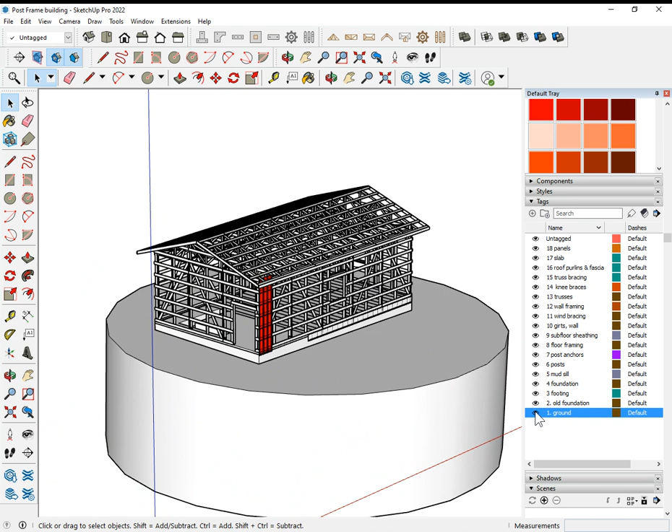I'm going to start from the ground and explain what I'm doing here. Let me turn off all these layers, and then we'll start from the existing foundation and show how I'm planning on building this post frame building around what's existing.

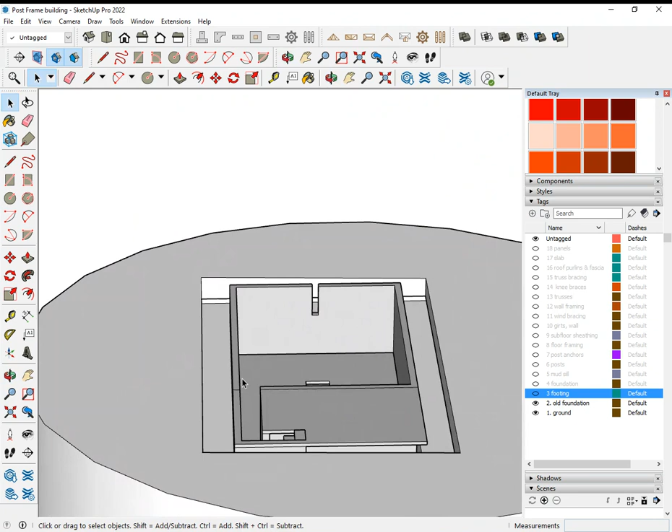Okay, so now the only thing I have visible on the screen is the existing building. There was a building, 100-year-old building or maybe older, over this foundation with the floor, but the building's been torn down, and we're trying to preserve the basement or root cellar with the floor, but we want to build a new building around it.

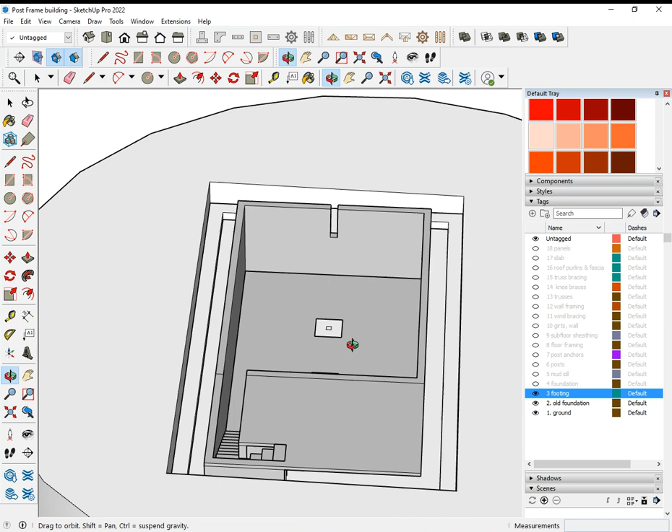So this is showing the new excavation, and this is showing the new footing right here. The new footing, we're thinking it's probably going to be 2 feet wide around the whole existing root cellar by 10 inches.

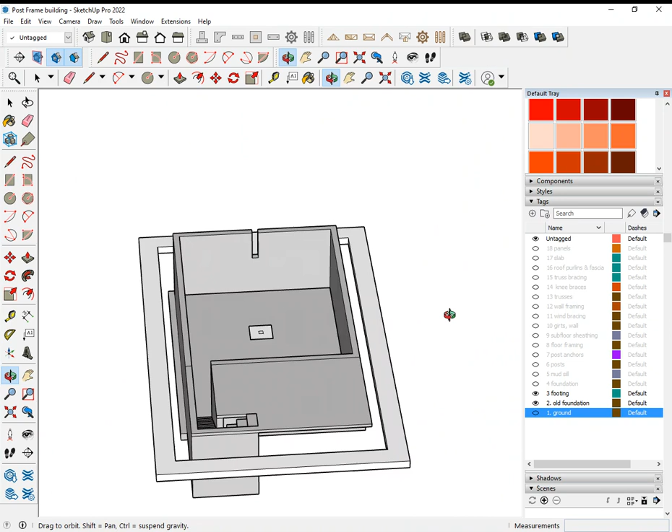Okay. Now I did not go all the way tight up against the existing foundation because I wanted to leave a little bit of leeway, and maybe it's going to help the old foundation so it doesn't crumble to pieces.

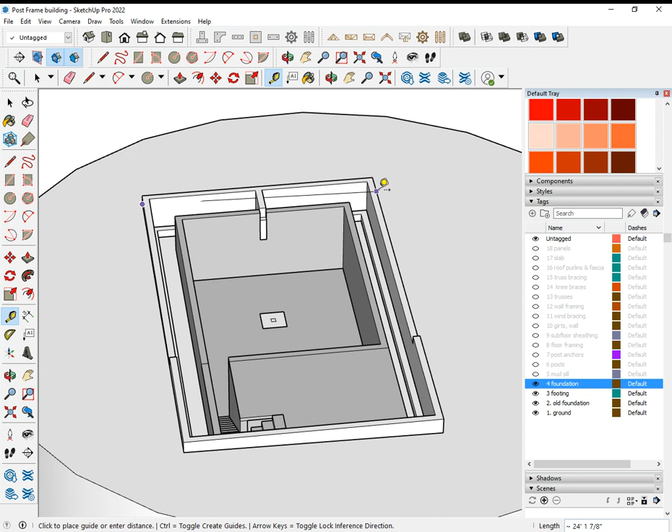Plus, once the new foundation is poured on the new footing, that's going to give me a nice even number. See if I can hook it right. Yeah, so the new building will be about 24 feet.

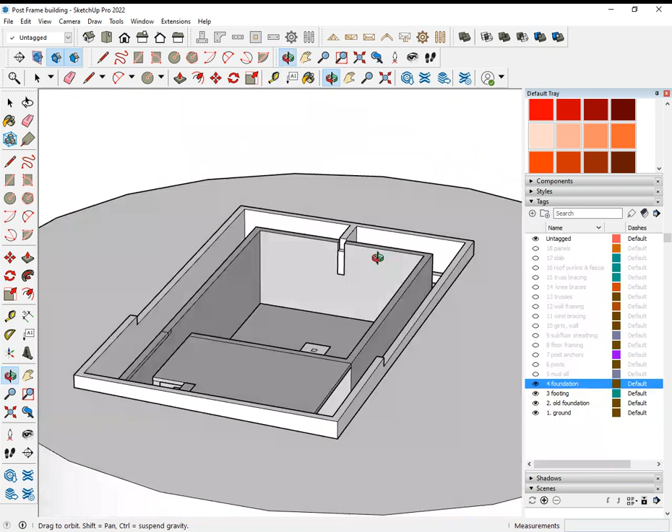Now also, what that's going to do by making it a little bit wider, if this old foundation is not completely square, which I doubt it is, if it's not completely level, which I doubt it is, we're just building a new foundation around it. So our new building is going to be square and level.

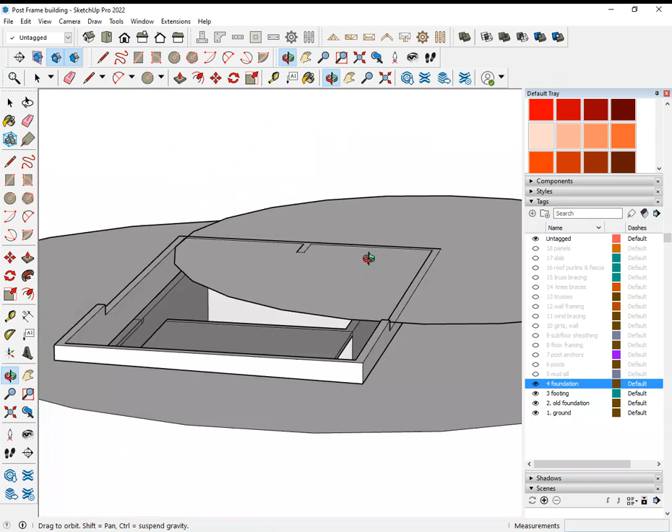Additionally, I have built this new foundation just a little bit above the old one. You see that? See how it's a little bit above that? The reason I want to do that is because I'm not going to rely on that existing foundation to be level. And when we put the floor together, you'll see why I decided to do the floor above the old foundation, because I want it to be completely independent.

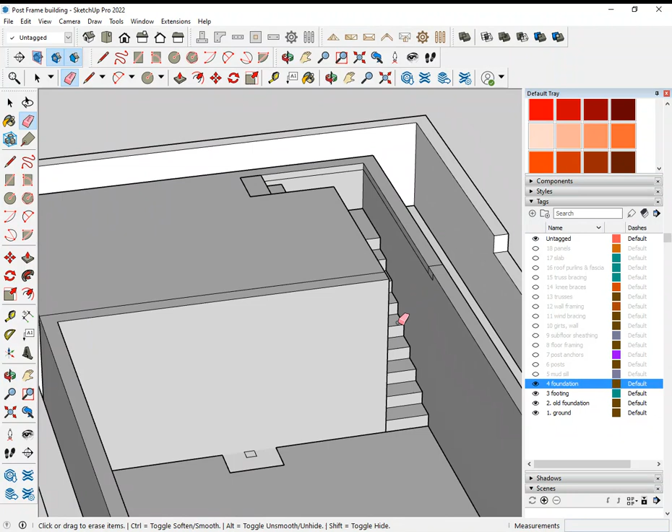Now, I'm not really 100% sure exactly how these existing stairs go, but it doesn't matter. This is just for the purpose of showing how the new building is going to cover the old building.

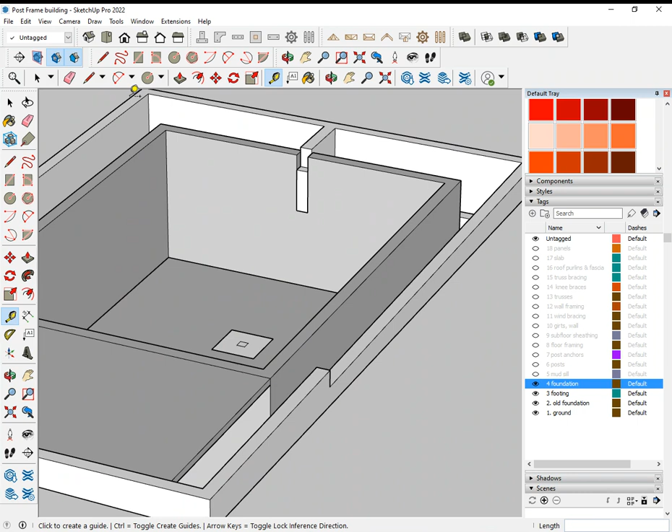Okay, so once the new foundation's poured, like I said, it's going to be 24 feet wide. And then I went a little bit longer. I went as tight as I could to the front here, but then it's about 40 feet, because you see how the foundation is stepped up. And I chose 40 feet because it's a nice even number that'll work out well with my spacing.

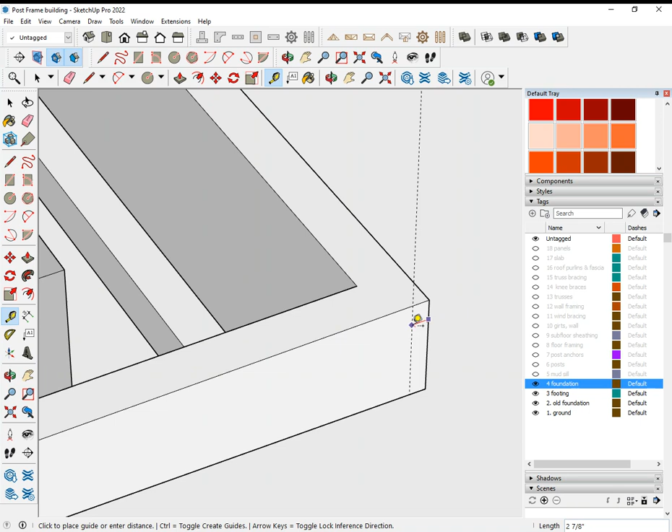And it's showing 40 feet 3/16, but that's not accurate. Let's see if I can keep this on the red plane. There you go. So it's 40 feet by 24.

Okay, so once this is all excavated and it's all poured, by doing that 40 feet, I had to add this little foundation to carry the floor right here.

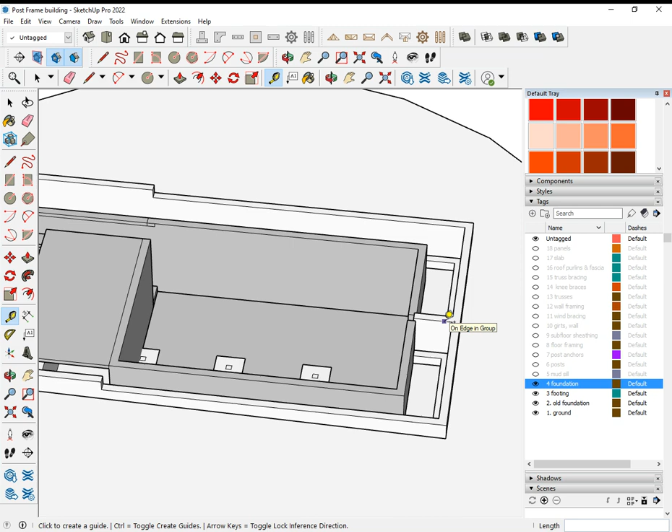Okay, so the foundation is poured. Then we come back, and that's when we put the mud sill on. The mud sill goes around the foundation like this. Now, right here, this is a 2x8 mud sill, and I'll show you why later.

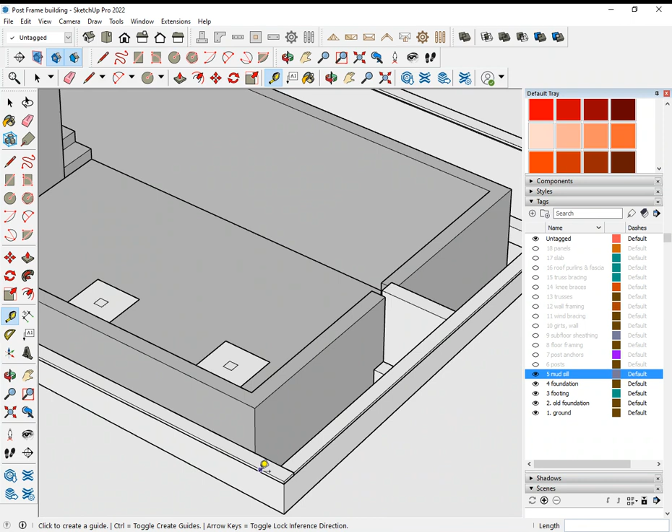Okay, I haven't shown the anchor bolts or anything, but this would get anchor bolts, and it would be the 2x8 mud sill. Now, right here, this part of the framing, it's just floating over the old foundation.

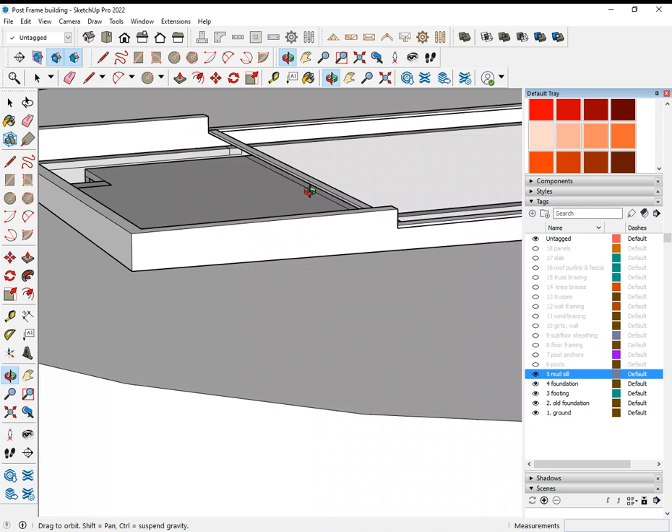Okay, don't worry about that, because we'll frame this 3 inches or whatever, however high it is above the foundation. We'll frame that in and make it so it rests some way on the old foundation. And this is not a critical bearing point. It's just all it's going to be is floor load. So it doesn't have to be on top of a new foundation or anything.

I just didn't want to start demolition on the old foundation. I don't want to demolish any of the old foundation. I want to leave it in place. We're just building a floor over it.

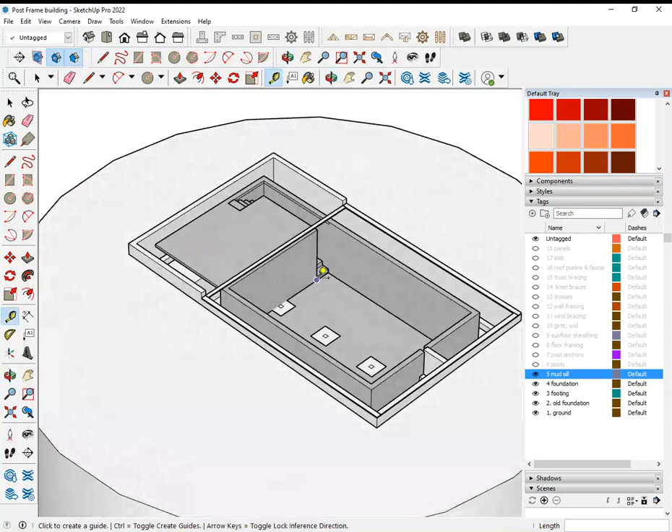Okay, so once the mud sill goes on, the next thing that goes on is the posts. So this is how my posts are going to go. They're evenly spaced, and the posts are resting on the mud sill right here. And the posts on this side are resting on the new foundation, where the new foundation steps up.

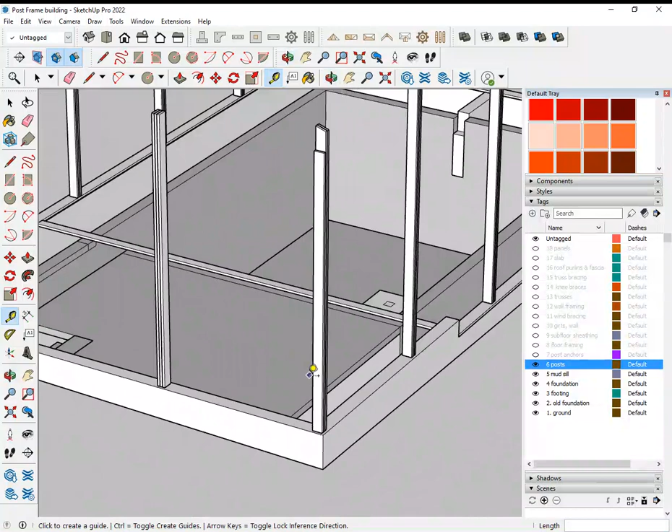And once I turn on the floor layer, it's going to make sense why the foundation steps up like this, because we want the floor to be where you can walk across it and there's no step up in the floor.

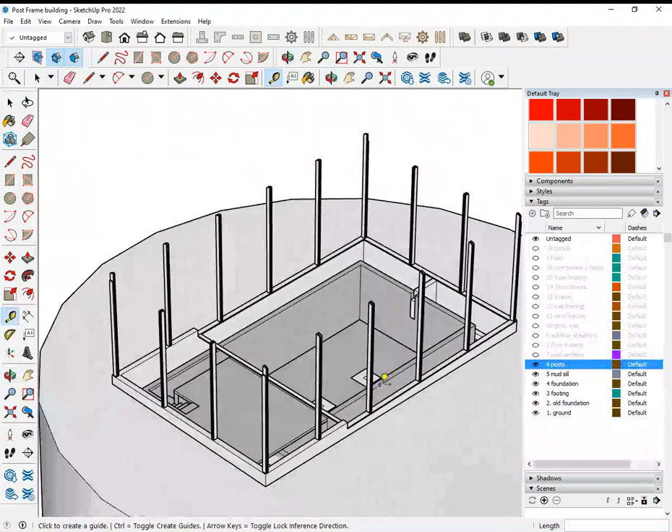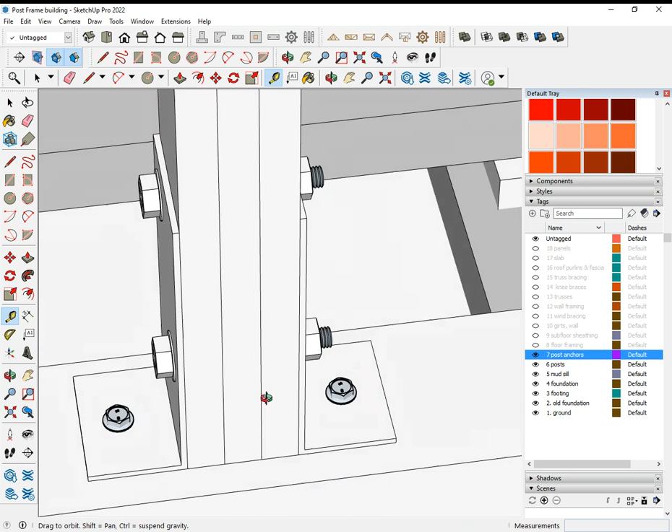Okay. But just look at the posts right now. Now how those are anchored to the foundation is like this, with these angle iron pieces. And this right here, it would just be a hole that we drill into the foundation. We epoxy in. I just put these bolts in because they were easy to download, but really what it's going to be is a rod epoxied in a hole with a nut and a washer.

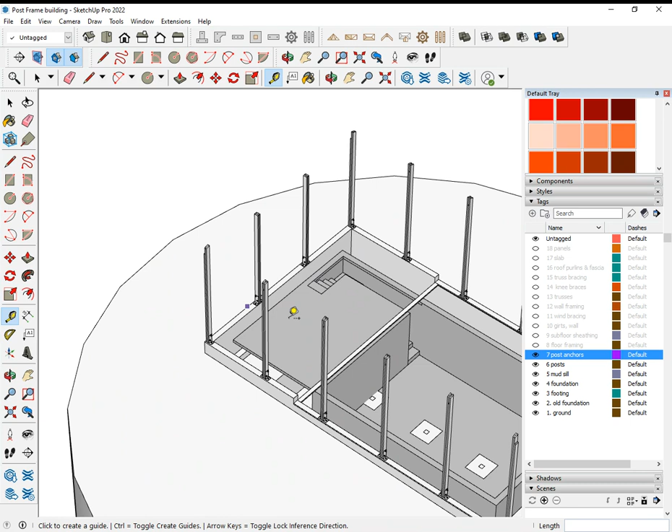And then the posts, they'll have the bolts going through the posts and through the angle irons. Okay. So that shows how the posts are anchored to the foundation through the mud sill. The only thing you're not seeing is I haven't drawn anchor bolts in from the foundation to the mud sill, but they would all go in here. Okay. I could draw those in later.

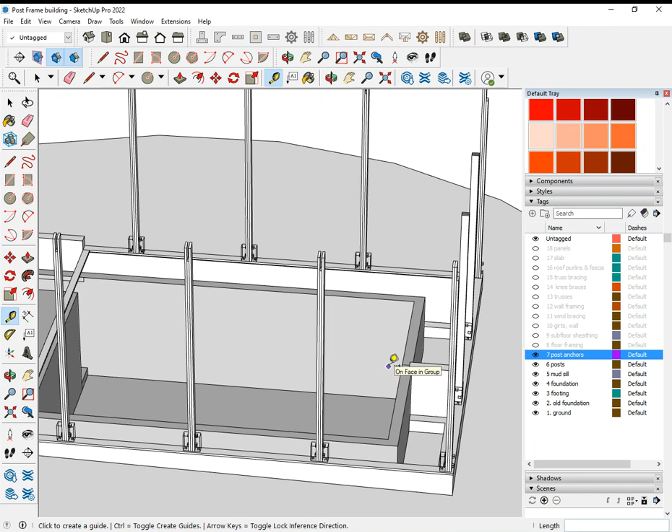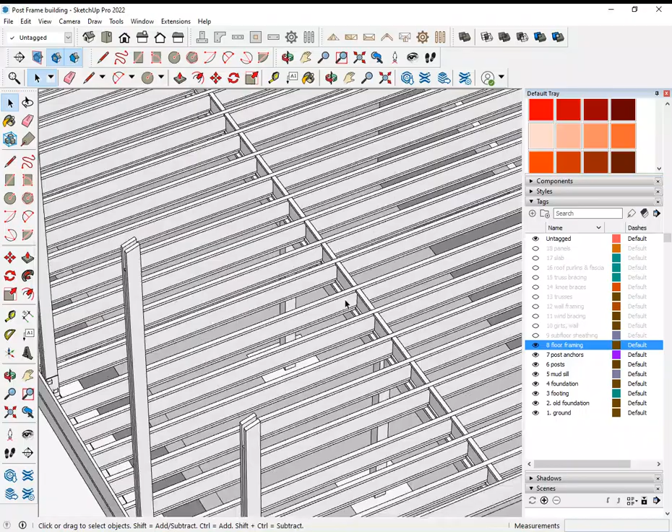Now, the next thing that goes on after the posts are set up and anchored is the floor framing. So here's the floor framing, the new TJI joists. They're 16 inches on center. And I am going to have to put a new girder beam down in the old foundation because the joists are not going to span 24 feet without a center girder. So that center girder beam is going to have to be there.

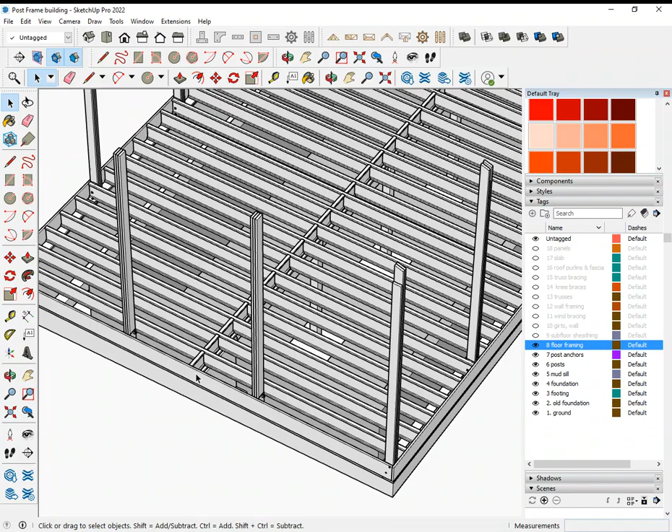I'm just planning these as wood posts, but they could be metal posts. I'm just planning the girder beam as a wood beam, but it could be a metal beam. The thing is that there's going to have to be a center girder there, and we can't use the old girder framing because it's just too out of plumb. It's just garbage. I can't use it. I have to redo it. Okay, so that's why these new concrete footers are going to be in to hold the posts.

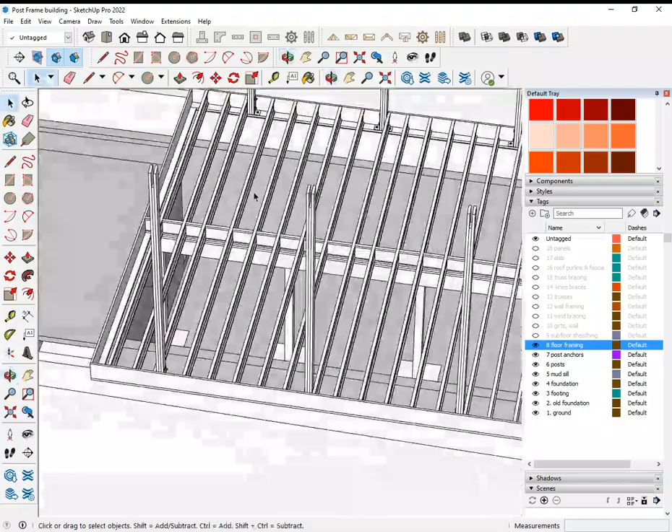All right. And I'm not even sure right now if there's a dirt floor down there or if it's concrete or what it is, but whatever it is, we're going to have to dig down and pour some footers down there to hold the load of the center girder. And the joists are blocked at the center. Okay, so that's the floor framing. Next thing we do is we sheet the floor like that. Okay, so now it's starting to look more like a building.

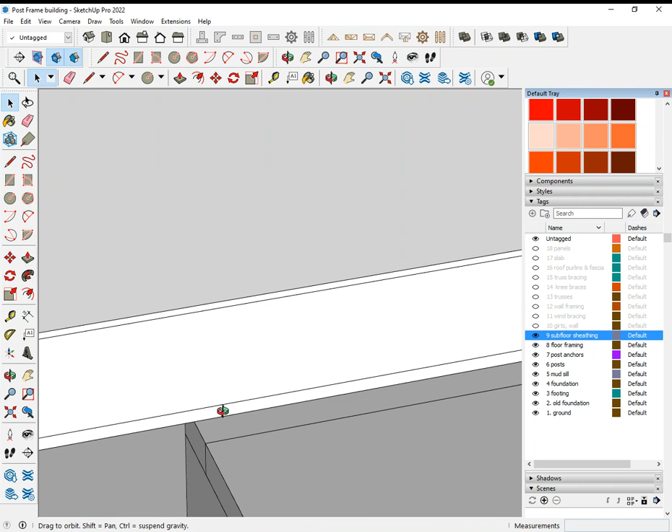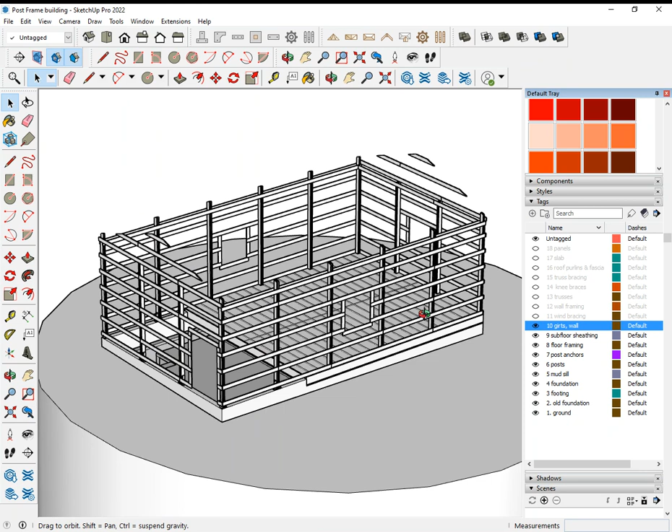And this is the part where we put some blocking under here to keep this attached, just to keep it from sagging right here. That's not a problem. I just haven't drawn it because it's something so obvious that it will be done on site. Next thing that goes on is the wall girts. Okay, this will hold all the posts up, keep the posts from falling down while we're building.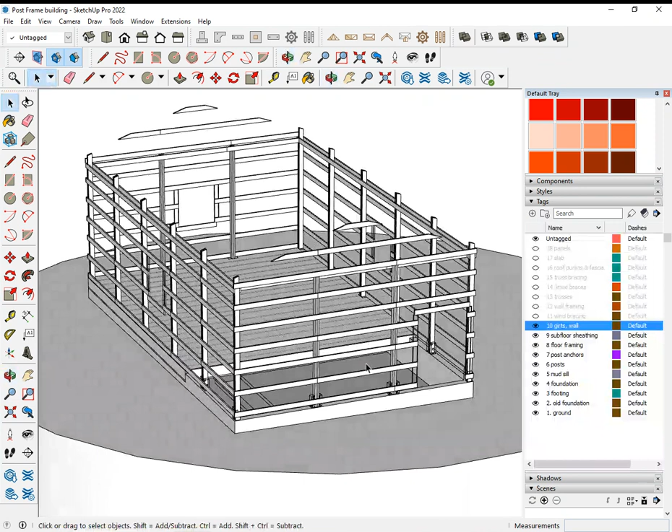Now, the windows, we don't know if there's going to be windows or not. I just drew those windows because this is really the only place the windows could go if there were windows. On the front, there's the double door right there that we talked about. And let's look at the inside. Now we need some wind bracing. This is the wind bracing. All right, see all these diagonal ones?

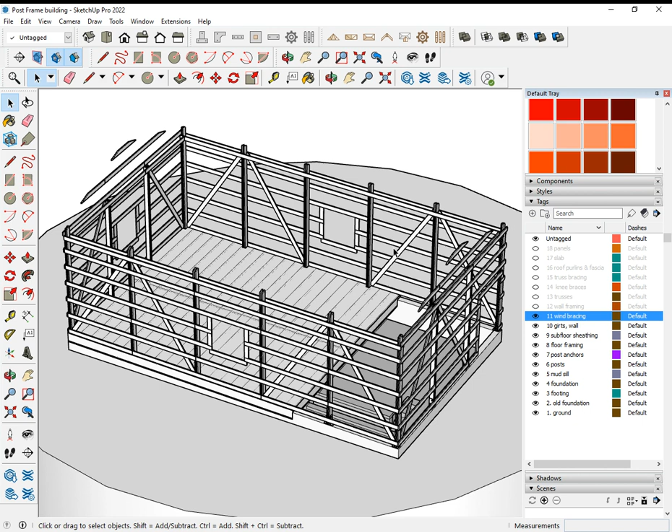If I don't put the wind bracing on, what's going to happen is the wind is going to blow on this wall and it's going to want to blow this long wall over. It could blow from either way and it could blow these walls over because the metal on the outside of the building is not strong enough to resist the wind. So if I don't put that wind bracing on, then the walls could blow over this way. All right. So the wind bracing has to go on.

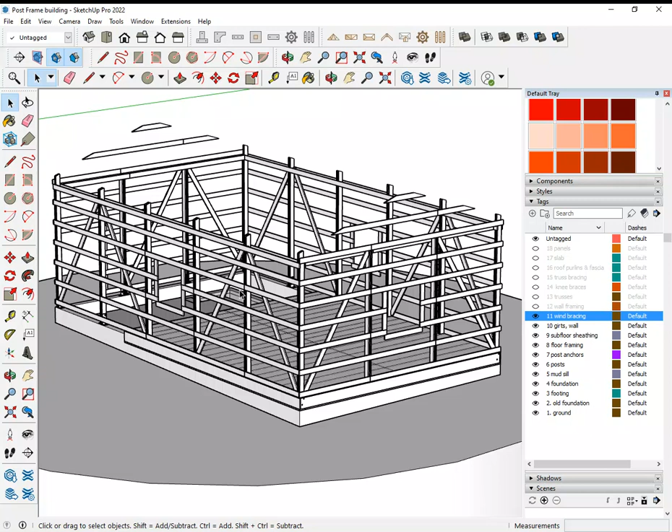That's why I said if there are windows, the windows have to go right here so they're not in the way of the wind bracing. Otherwise the wind bracing will have to be reconfigured. And this to me seemed like the most obvious place for windows. If there are no windows, then it'll have to be one of those translucent rows of panels up on top or something else. But if there's no windows, that's not a problem. Those will just get covered over.

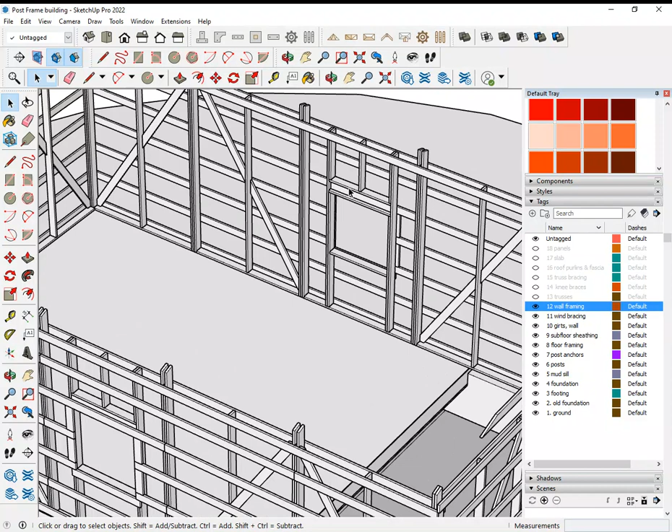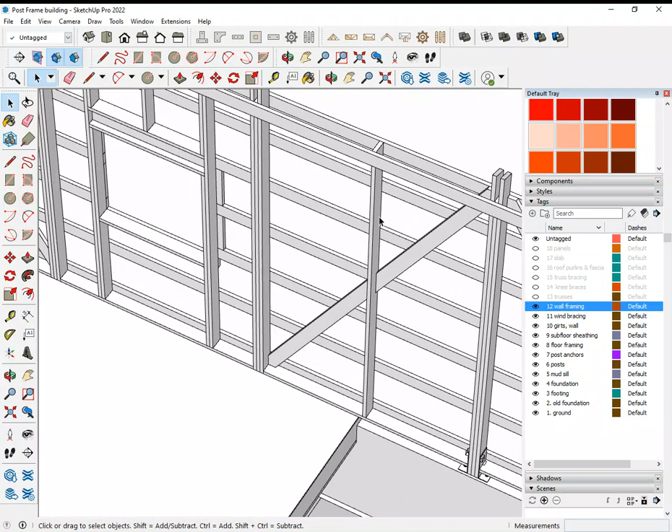This is the wall framing. In order for the windows to go in, I have to frame around the inside. And then you see this is also where I put the intermediate 2x6s all the way down. The 2x6s are going to have to be notched into the wind bracing, but that's not a problem. That's an easy notch right there. And the whole reason I'm putting these intermediate 2x6s into the wind braces is because above, then I have the trusses. All right, you see that? Now I have a place.

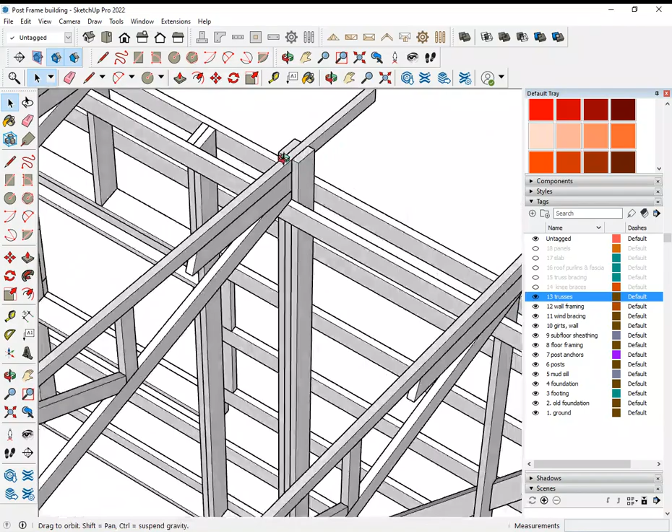My trusses are 4 foot on center. I mean, it's all divided out equally among this 40-foot length. But now I have a place where my trusses sit, and it takes the load of the truss all the way to the foundation. Of course, the trusses that are sitting on top of the posts, that's obvious because those sit on top of the posts, and then that way there's a nice way to anchor that post.

Okay. We're going to have some kind of an additional anchor right here, which I haven't drawn in, but that's just an easy, like a Simpson H2.5 hurricane clip, like on a regular house. So that's an easy connection. It's just not drawn there.

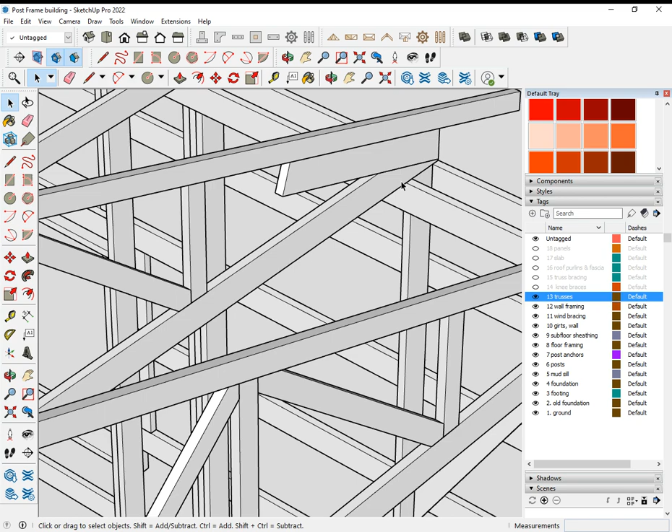All right. The next thing that goes on is the knee braces. It's kind of getting hard to see what's going on in here, but these knee braces are like this. See, that's the knee brace. And that's going to go on, and it's going to keep the wall from blowing in this way. See that? The trusses are going to lock both walls together, but those knee braces are going to make it so it's almost like the wind is only blowing against an 8-foot wall instead of a 12-foot wall, because the ceiling height on these trusses is 12 feet.

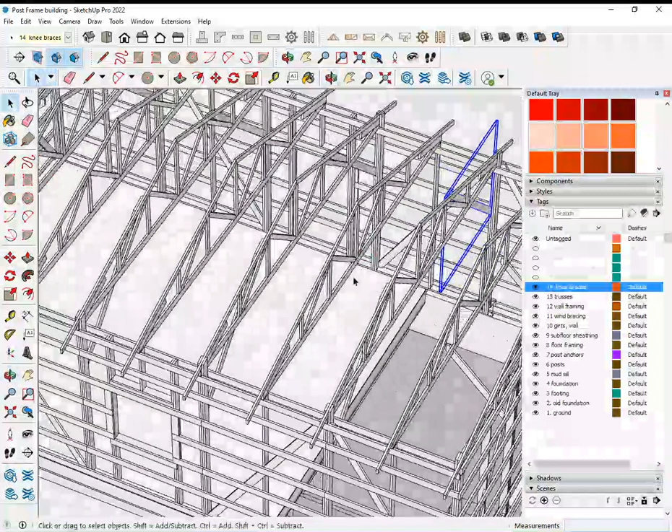From here, from the bottom of the truss to the floor, it's 12 feet. I just try to keep that locked on the blue axis. There it is. It's locked on a blue axis. And you can see it's 12 feet, like I said. Okay.

But sorry about that. I don't know what happened there. Let's go back to here. Hopefully it's still recording.

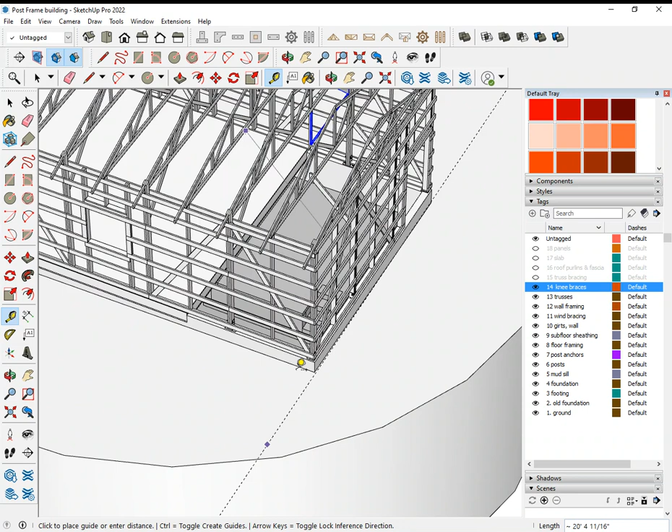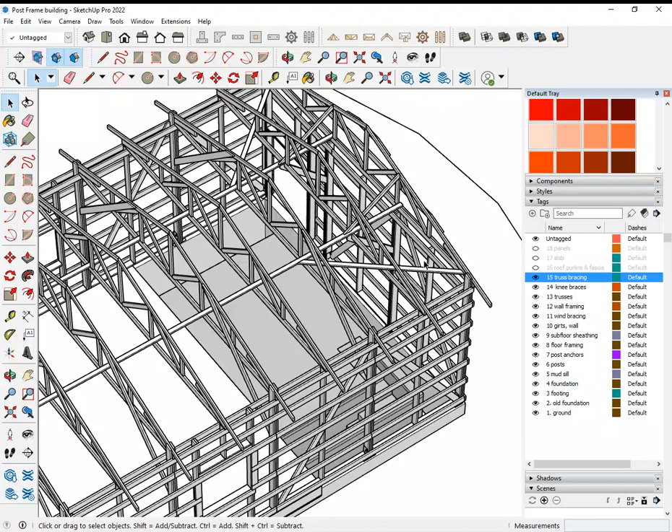But the knee braces, they're going to help the barn to be stronger. Okay. Now let's look at the truss bracing, which this is the truss bracing right here. And the reason I did that is because it's going to lock everything together better. And the truss braces are right above these knee braces, and they go all the way through. And then I have the diagonal braces up. Okay. And this is all going to lock together.

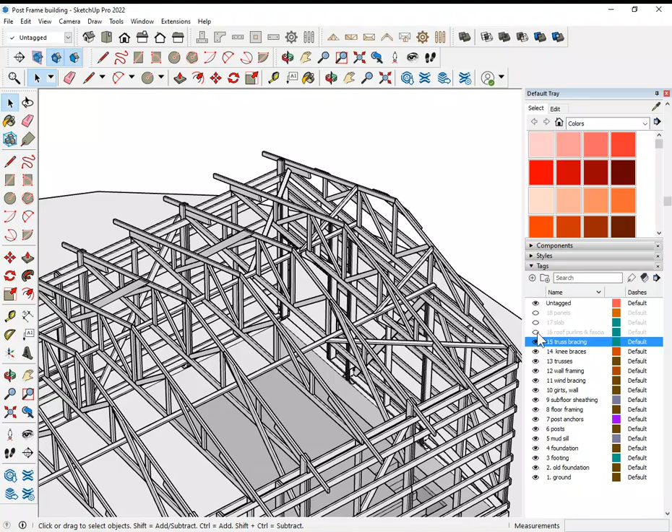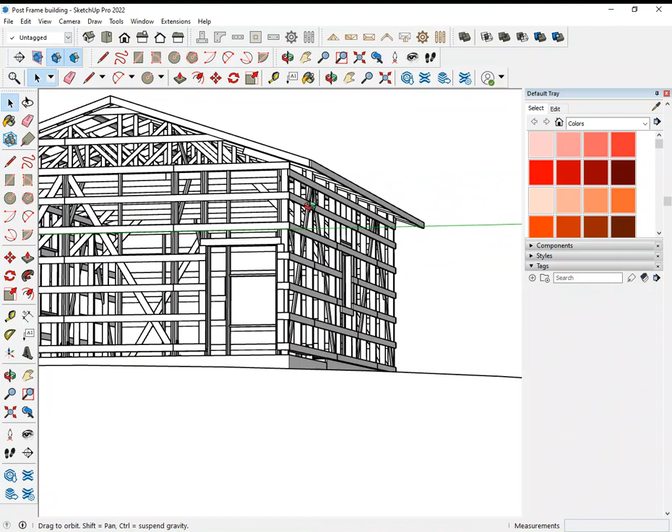Once I put the roof purlins and the fascia on, it's going to make these braces in the roof serve a function. What they're supposed to do is hold all the roof together and keep it from blowing around and wobbling around. So these are the roof purlins, the fascia. Even though this is a post frame building, we're doing an overhang to keep the water off the panels better, keep it from dripping right up against the foundation. And it's going to cast the water off 2 foot away from the building. Okay. Assuming no wind, of course, but having the overhang is just so much of a better building.

And this is how I'm going to hold the barge rafter, if you want to call it that. It's going to be held up by all these purlins, 2 foot on center, 2x6s. And it's a 4/12 slope roof. Should be pretty easy to walk on.

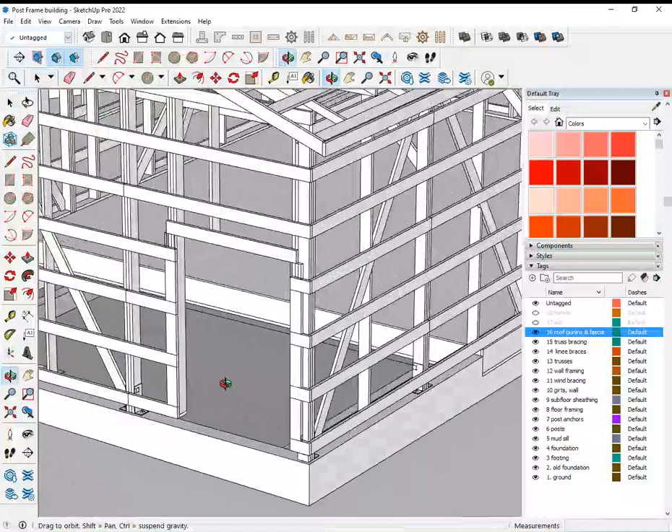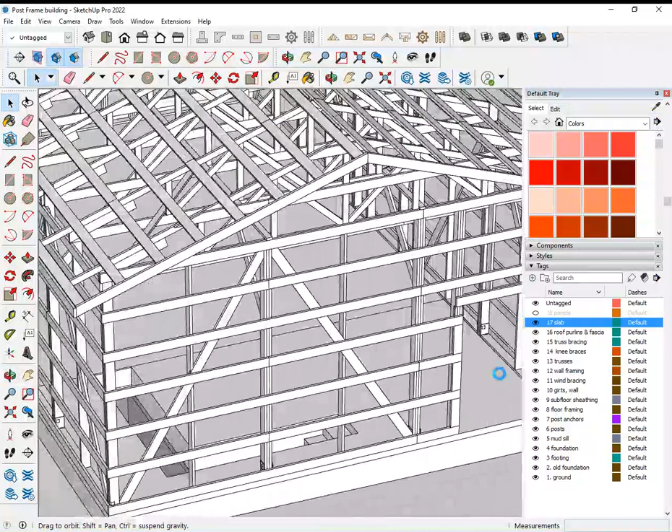And very strong. And then now on the inside here, I plan on framing it like this with these bottom girts up 4 inches. Okay, because what we're doing here, we're leaving place for the new slab. So here's the new slab. Later, after we get this all framed up, the concrete guy can come back in and he can pour his slab. Okay, and his slab will go right up under here, right up under the building.

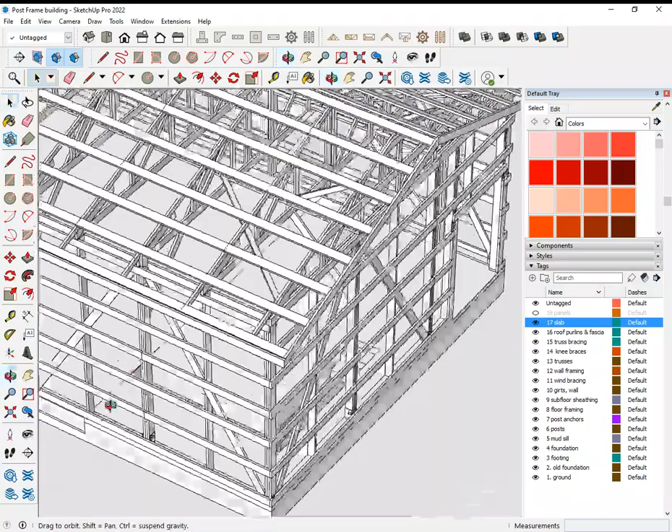Okay, so when you walk in, it's all normal, and the concrete slab here is the same height as the floor. And then however the concrete guy figures out how to interface his slab with the existing stairs, that way there's still going to be a space down to the root cellar or storage or whatever is down here. But that's how this all ties together.

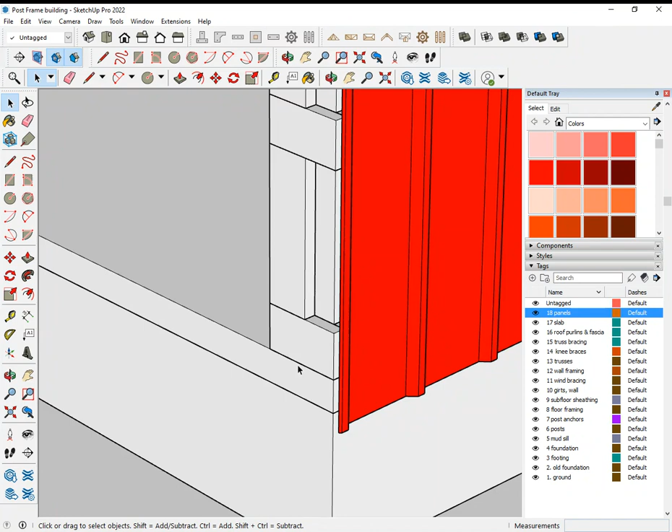And then once the wall panels go on, they go on like this. Okay, I haven't drawn all the wall panels, but they're going to overhang the foundation. That way, any water that hits it is just going to go right down there, and it's not going to seep back under the floor. So I don't need an extra piece of flashing here at the foundation because I'm planning on making the framing flush with the foundation so that the panels overhang.

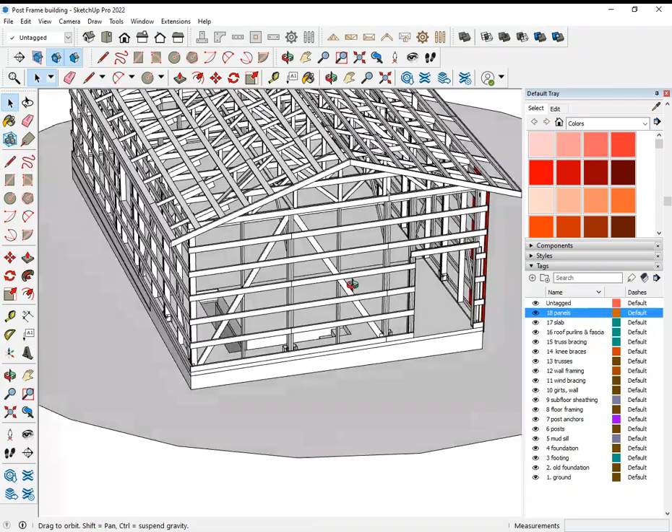So that's the structure. That's how I have the structure. Now we can send this off to the engineer, and if he wants to change anything, he can. And then once I get the approval from the engineer, then I can go ahead and model all the panels, all the pieces around the windows, if there are windows, around the door, put the roof panels on, the soffit panels. So this is a representation of the structure.